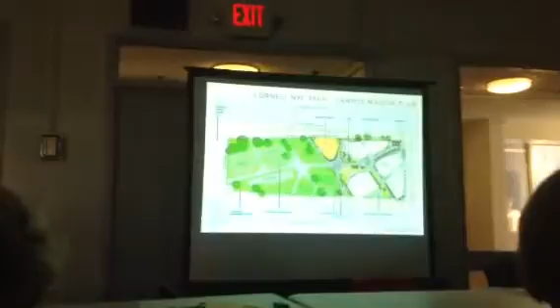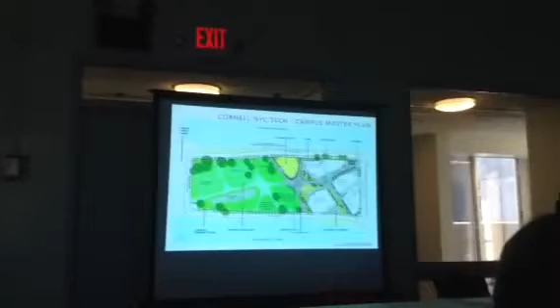So I will move a little bit quickly through the first part of this, which is just a reminder of where the residential tower that's being planned now for the campus is located. I'm sure you're all fairly familiar with what's happening in this quadrant of the island. We're going to talk a little bit about just the location and the program, the actual use going on in the residential tower for the campus, and then we'll talk about the design ideas that led to the forming, shaping, and appearance of the tower, and certainly invite your thoughts and feedback on all of that.

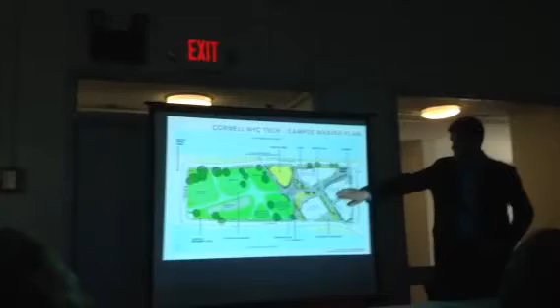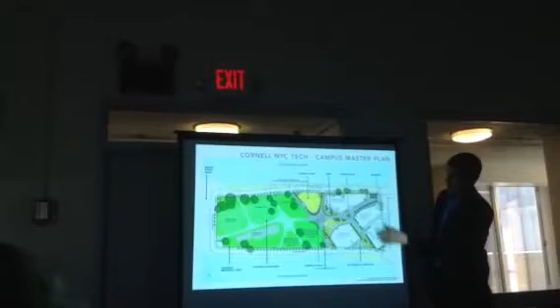So the location, based on the master plan, the location of the residential building is kind of interesting because it's at the far corner, the far northeast corner of the campus right here. It's this rectangle that you see right there. It's set behind the central utility plant, which is a relatively low one-story structure. It's nearby the future Executive Education Center, which we're not focusing on tonight. You'll see one or two images of a general form for that. And it's at the opposite corner of the main gateway plaza, which enters into the northwest corner of the campus next.

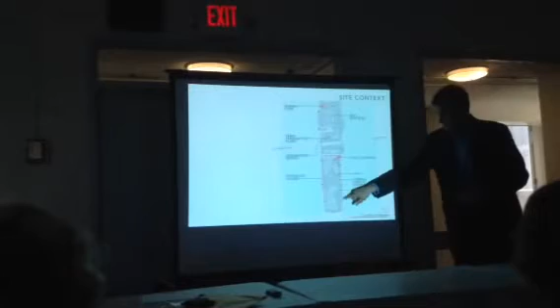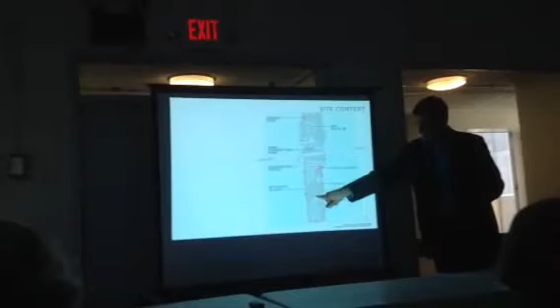You all know this island better than I do, but it's also part of the loop of the local bus line wrapping around. And so that's interesting too, because there is a bus stop being planned for this, as one of the entry points into the tech walk into the center of the campus, and the main plaza space that looks back out in all directions, really, both over Manhattan as well as Queens.

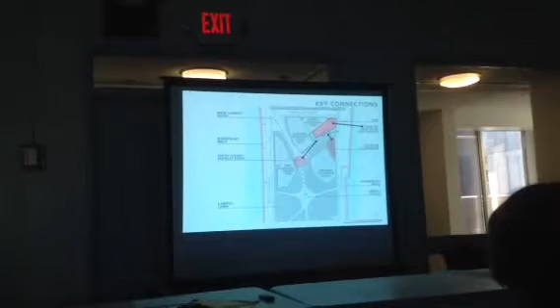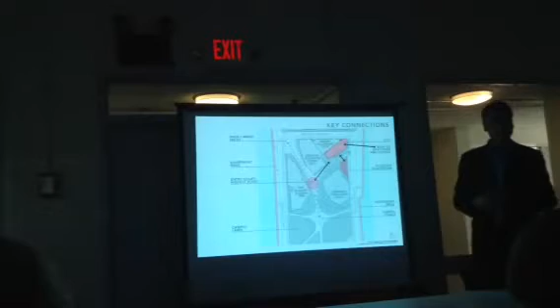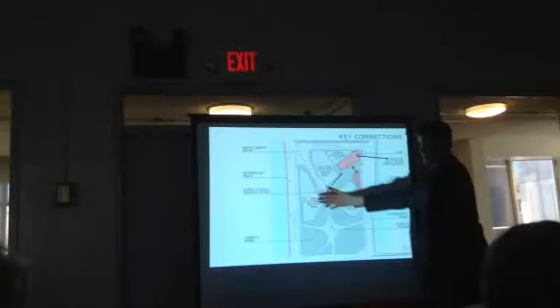Next, there were several simple, big ideas in terms of how the building is going to relate to the campus. The master plan had already been established, reviewed by your committees and the community. What's interesting for us is this location that is sort of corner related, which is a much different situation than, let's say, the corporate co-location building, which is at one edge of the campus, the FAB, the First Academic Building, which is on the western side. And here we're actually holding down a corner of one of the taller buildings for the campus.

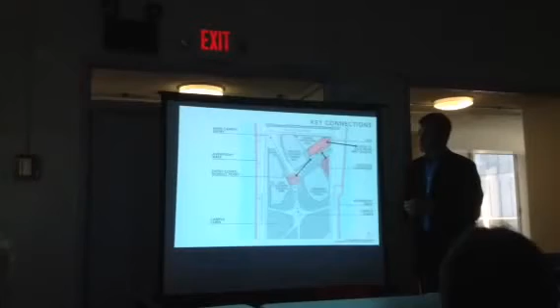There are three primary concerns in thinking about all the students that will be living here, and I'll come back to that in a second. One was the relationship of the building and its entrance to the center of the campus.

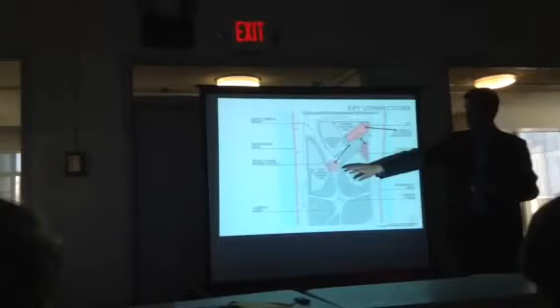This is really the center of life with all the different activities going on inside and coming out of these buildings, also a kind of central meeting place. So the focus is between the building entrance and the entry court.

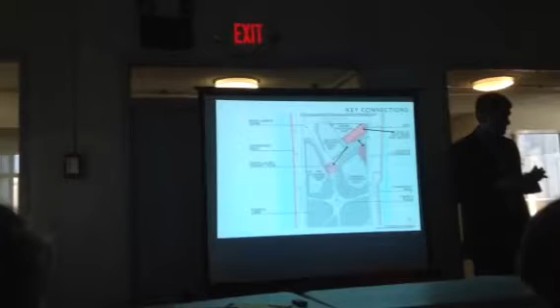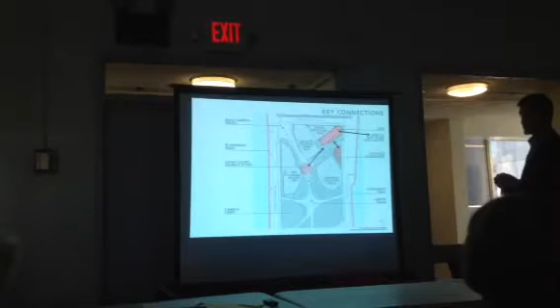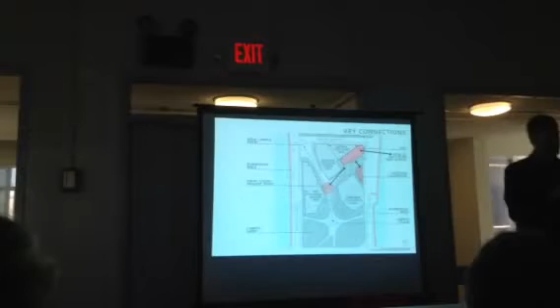The second was the relationship of the tower, and in particular the lobby spaces, and how they open back out to both Tech Walk and to the East Loop Road, and what's been called the outdoor classroom, and the relationship between that open space at the south edge of the campus and the lobby spaces. The third was the views from those same amenity spaces, how they open back out to the river and to Queens beyond.

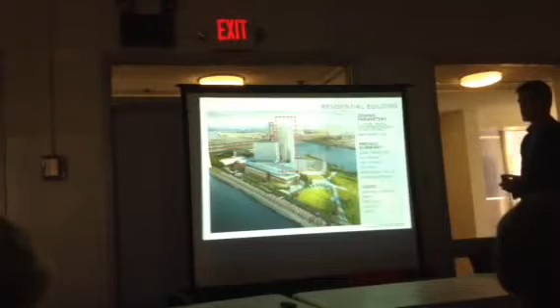The basic parameters of the project: it's about 270,000 square feet total, 26 stories tall, 285 feet to the top of the roof. That's a good 25 or 30 feet below what's allowable, so we're actually at a lower height than what the zoning permits there.

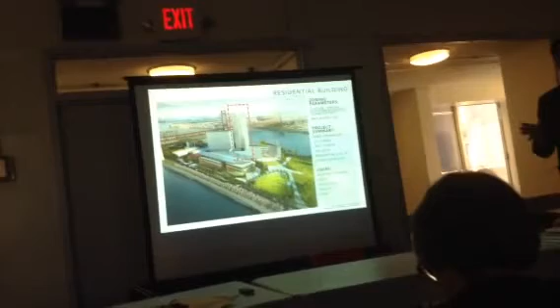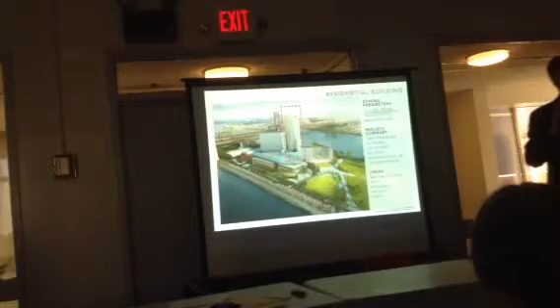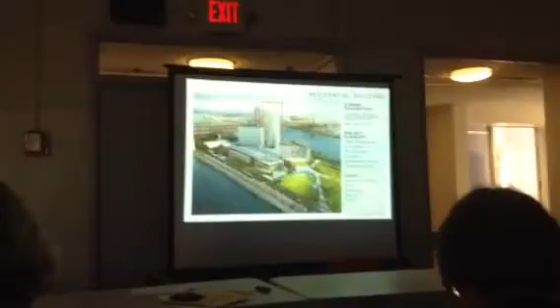It's about 356 units of different types, ranging from fairly small studios to relatively compact 3-bedroom student apartments. There are about 10,000 square feet per floor, and the people using this building almost exclusively are graduate students, PhDs, postdoctorate students - all the students living on campus will be in this building. It's dedicated to students as well as faculty, and faculty or students who may have small or younger families too, so there's a component for family living in the building.

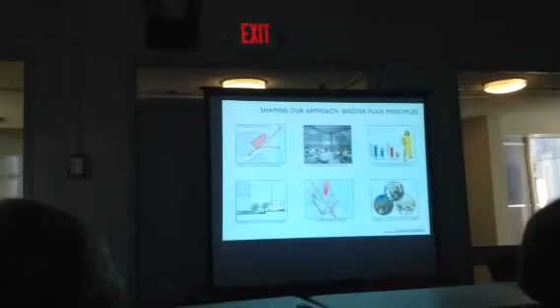There were really six principles guiding both the master plan and the development of the campus concept, and each of these is reflected in how we developed the design of the building.

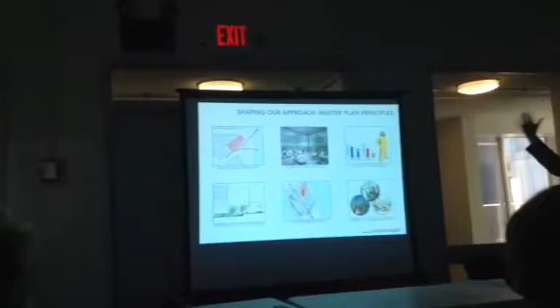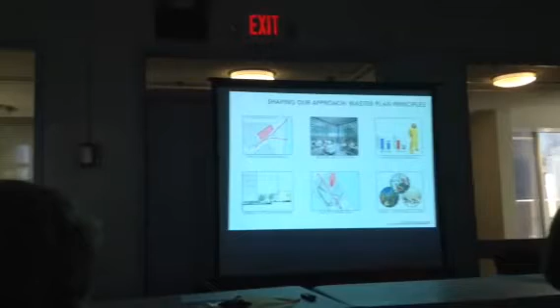That had to do with the sense of the river-to-river experience we get in such a pronounced way here on Roosevelt Island, and the relationship of indoors to outdoors, how the life inside the building can open up and communicate back out to the street and to the community.

Optimizing performance is a very interesting thing, a big driver for our design concept of the building. That has to do with sustainable design principles and making this a fairly high performance building, along with the various kinds of activities that happen in it.

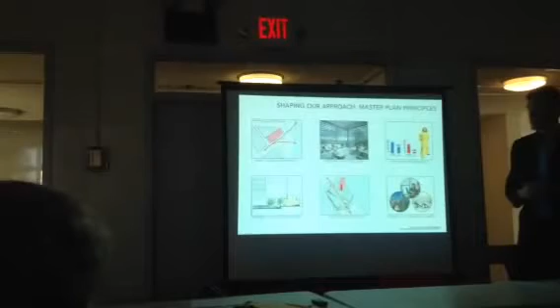This diagram shows the lower amenity levels and how they tie back out to the Tech Walk and to the street, reinforcing that pedestrian spine which is part of the main campus plan.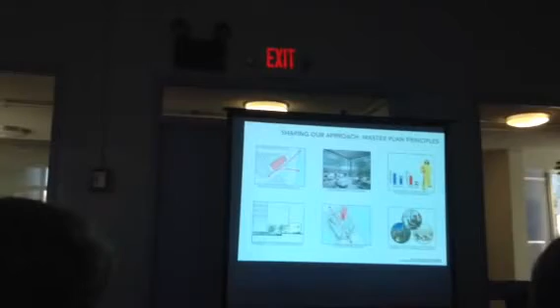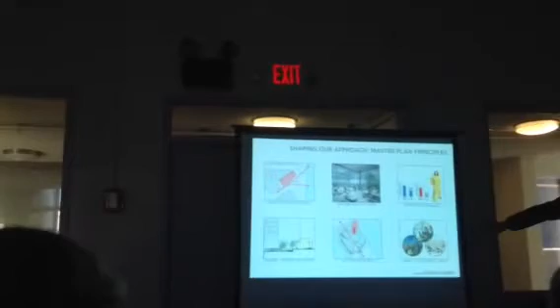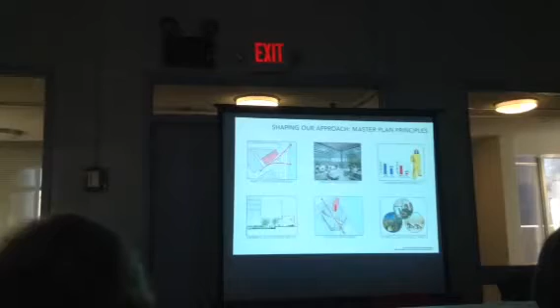Those irregular pathways constantly reinforce the sense of the ridge running through the center of the island - a big driver for the campus planners at the time. We wanted elements in the building that would acknowledge that idea, along with the whole notion of sustainable design and green elements, which are paramount to both Cornell and Hudson development as the main programmatic driver and goal for the building beyond housing students.

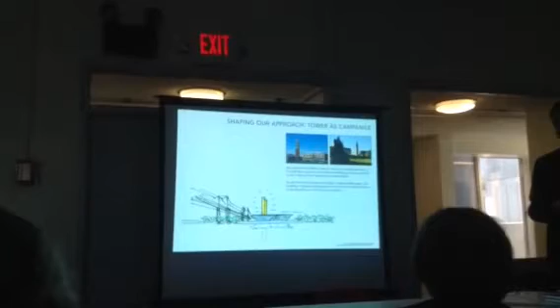One of the initial inspirations for us was thinking about a building of this verticality right on a river's edge. We were inspired by two things: river and waterfront buildings, and tower elements. We knew this was going to be a tall building right from the beginning.

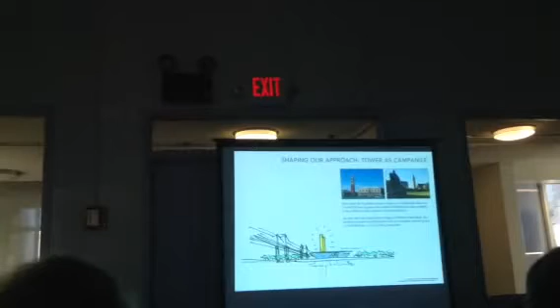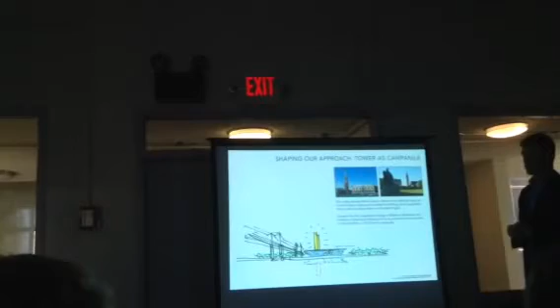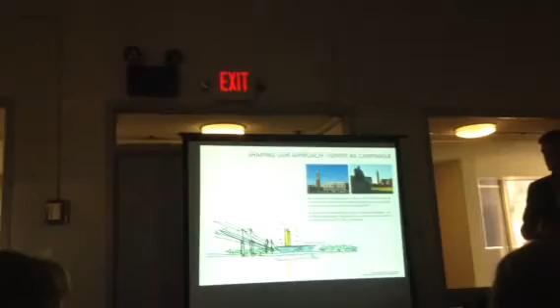We understood there's a kind of wide side and a narrow side, and we were very interested in the presence of the narrow side and its relationship to the river and the other campus buildings. This is a conceptual sketch from Manhattan looking towards Roosevelt Island, thinking about what the relationship of this tower-like building might be to the lower scale academic buildings.

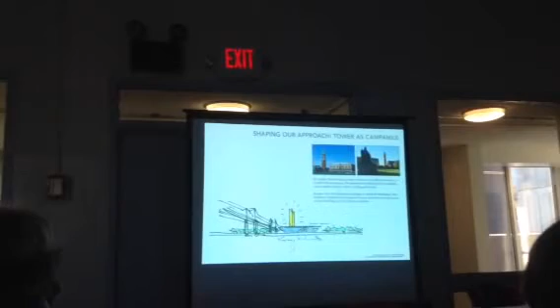Cornell's campus in Ithaca was also another inspiration - I have to confess, I'm an alumnus of the school, so this stuff was embedded in my gene pool as a designer. But more importantly, the relationship of this tower to the river on both sides was a main driver in thinking about the form and shaping of the building.

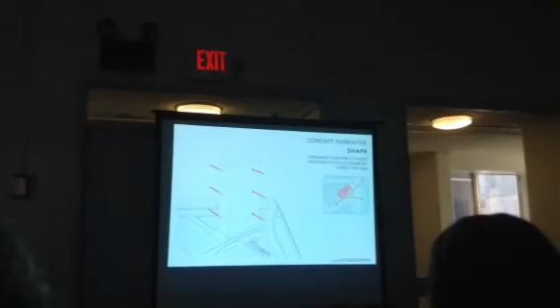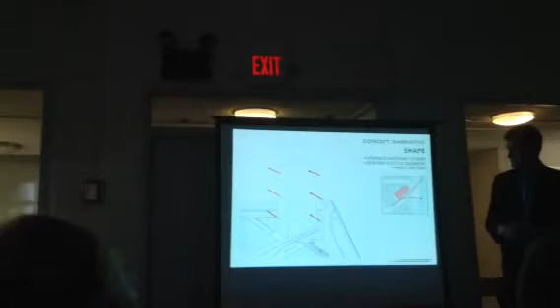So speaking of shaping, the master plan as we received it when we first started the project with Hudson and Cornell was essentially a rectangular footprint. This was the location in this corner, identified as a box that could be up to 320 feet tall, with a footprint of about 10 to 11,000 square feet in that location.

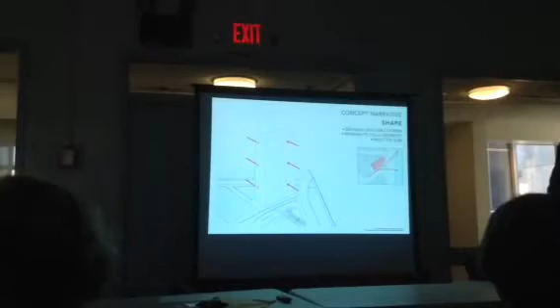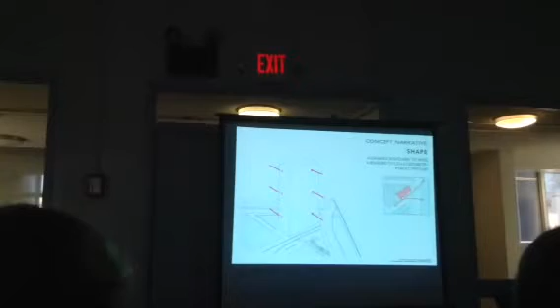Our first desire was to think about how to break down the scale of that box a little bit. We knew it had to be about the breadth and height it needed to be, but were there other ways to form and shape the building, give it more nuance and scale, and respond to things going on around the site.

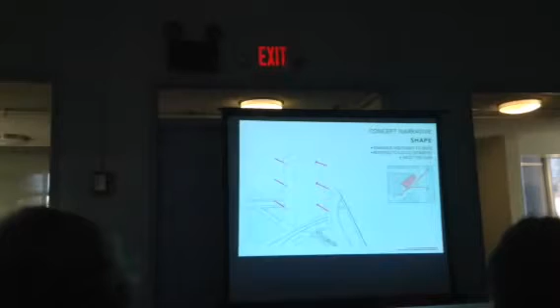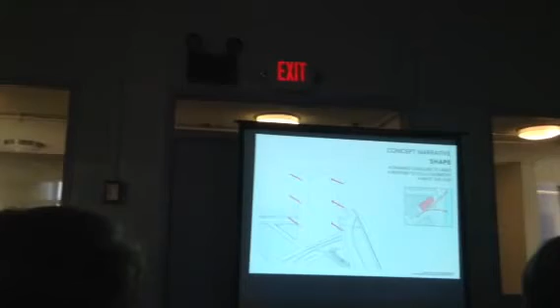So the first was to think about how to shape the building and how to relate to the other two, really three other buildings that had already been designed. I think some of these have all been through your review board. And so we're coming in as the third player, already responding to other architecture that's being planned and eventually built preceding our project.

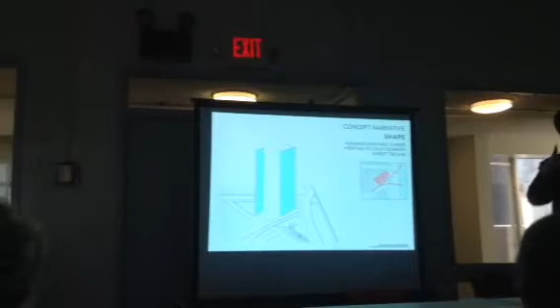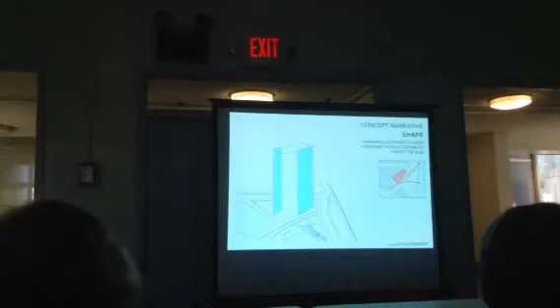So we're thinking about how to shape the vertical surfaces of the building to begin to inflect it, to give it a series of additional corners that would help reduce the optical effect of the width of the building. Also at the end grain, at the two shorter ends, thinking about those relationships—this is a diagram from the east looking towards the west.

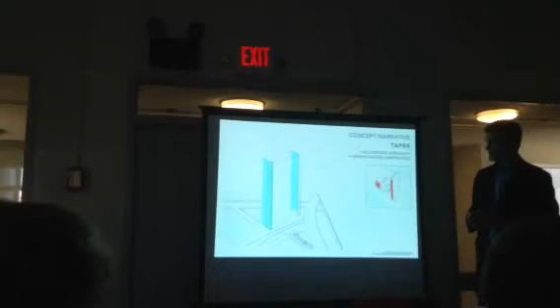There's the Colo building. There are some interesting urban design elements going on in the Colo facades, these series of planes and large, relatively low-scale volumes—give or take about 80 or 90 feet tall—and how the edge surfaces of the east face of the building might work in coordination with those planes. That's one of the things that was very important to us, to begin to make connections to these other buildings already planned for the site.

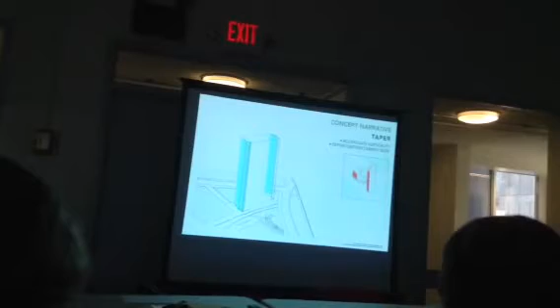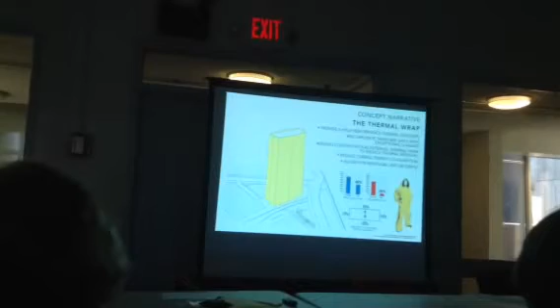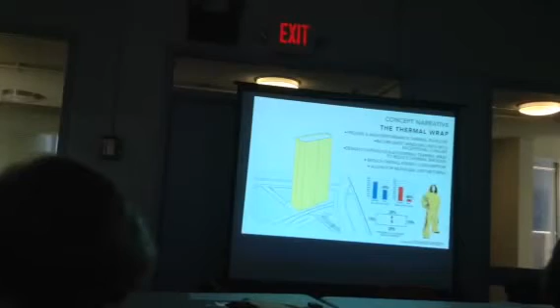I was talking earlier about sustainable design and energy use and high performance characteristics, and this was really the big idea for this project. The goal of the design team is to see if we can set a new standard for energy performance in a high-rise residential building. This is going about it in a way that has not been done before, and we felt strongly there was a way to also begin to express that idea in the building.

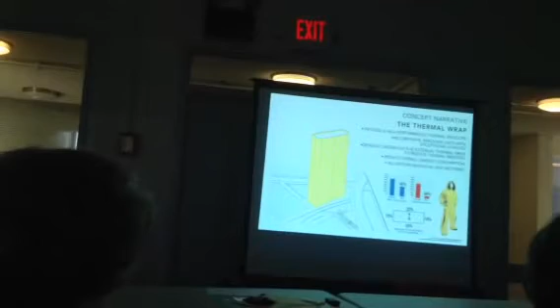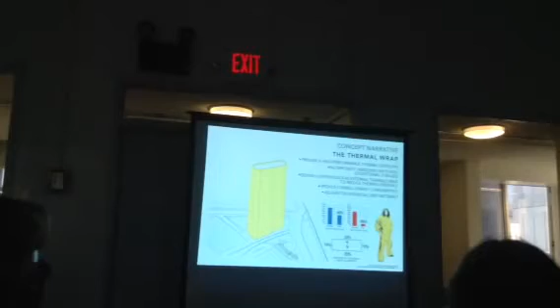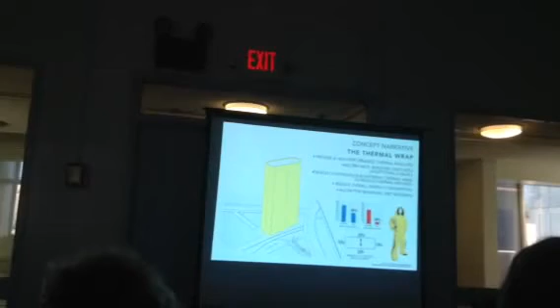I was thinking of it almost as if it made a big thermal wrap—took a big blanket and wrapped it around the building, containing both the heat and cooler air during the summer, and heat in the winter, like walking around in your own sleeping bag suit. We thought about how we can achieve that high level of performance in a passive way—not with active energy systems, but with a relatively thick insulated wall around the whole building and high performance windows. That became a driver of our design concept.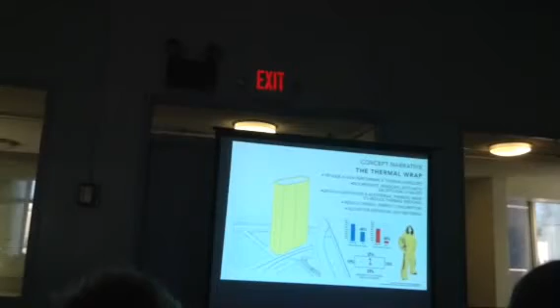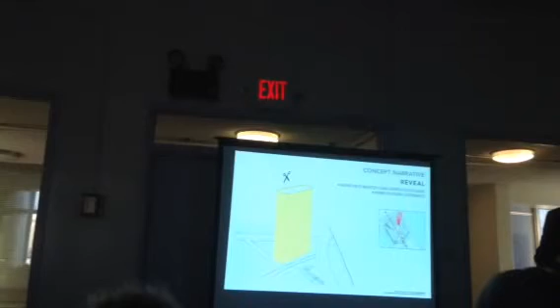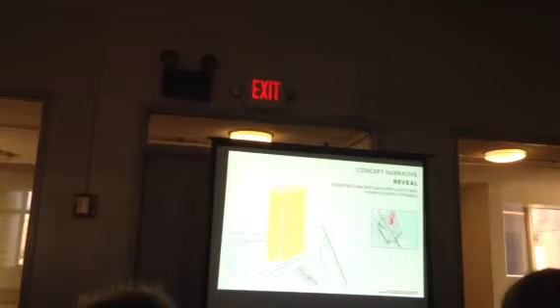So now we have this building with a particular form, and we begin to want to open it up and make other relationships of that form to the campus. One is to create a primary reveal on the entry side of the building, which led towards breaking the wrap and opening it up, revealing part of the inside of the building, and in particular using that vertical edge to give visual focus to the entrance, right here at the base, just next to Tech Walk.

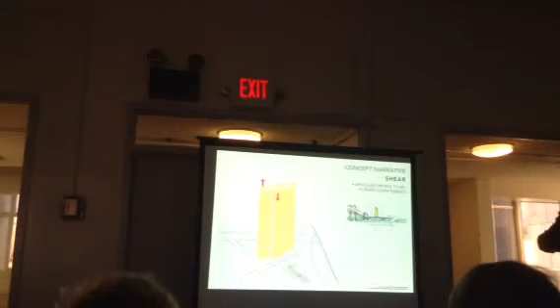At the same time, we thought about the profile to the sky. The thing we don't always like to do is just flat top buildings, and it felt very important for a campus like this—also because some of the other low-scale buildings already through this process have these beautiful solar arrays on top, like little parasols on the building. We wanted something that would act as a strong counterpoint to that.

At the same time, we're also inspired by the geometry and characteristics of the Ed Koch Bridge, and those two ideas began to percolate in our minds.

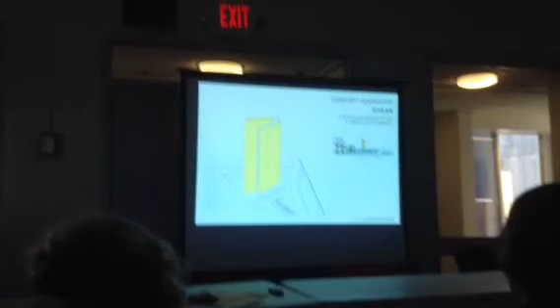So we take it and kind of shear it apart, so there ends up being a higher part and a lower part, and we get a strong diagonal profile at the top of the building, which allows a terrace to occur up here, and at the same time gives a stronger characteristic to the top of the tower.

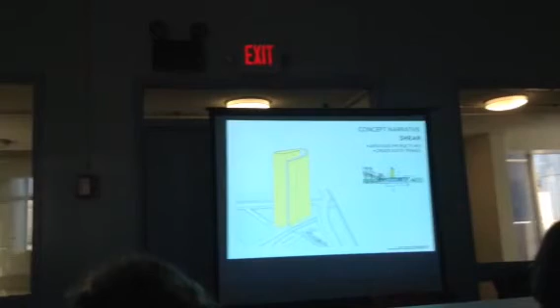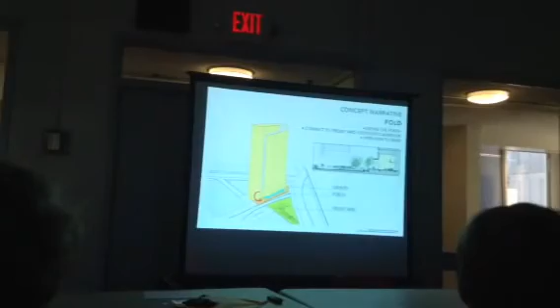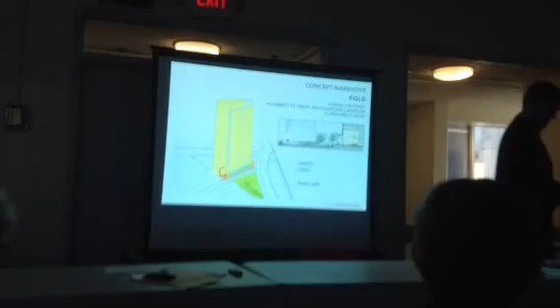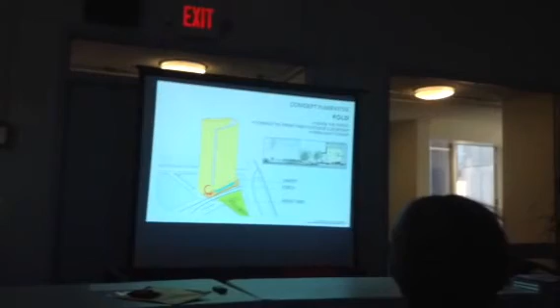At the same time, there's a concentration on making sure the pedestrian realm is respected, with a strong connection between inside and outside—one of the principles of the campus design master plan. The lobby is seen here, and the thought is to lift the wrap up, sort of like pulling your pants up and showing a little bit of your stockings or socks, with this elegant, highly visible window wall underneath to allow the spaces inside—the lobby and some of the lounges for students—to look back out.

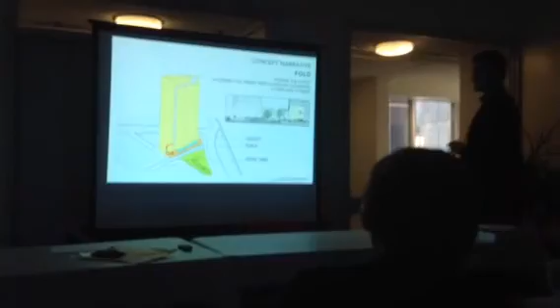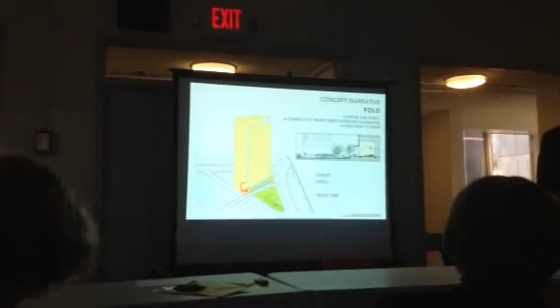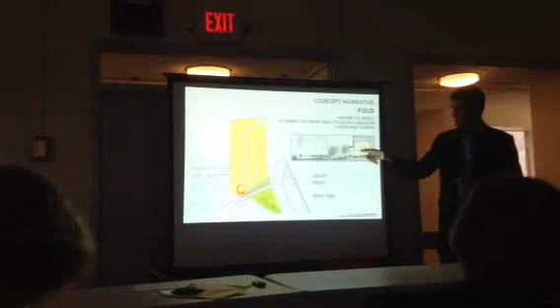They look out over what we call the porch, this terrace just a couple of feet above the Tech Walk, looking back out over what we call the front yard, but also called the teaching garden, on the east side of the campus. So there becomes a very strong link between outdoor active and passive uses, the porch, and how it opens into some of the lobby and lounge spaces inside for the students—a very dynamic relationship between inside and outside.